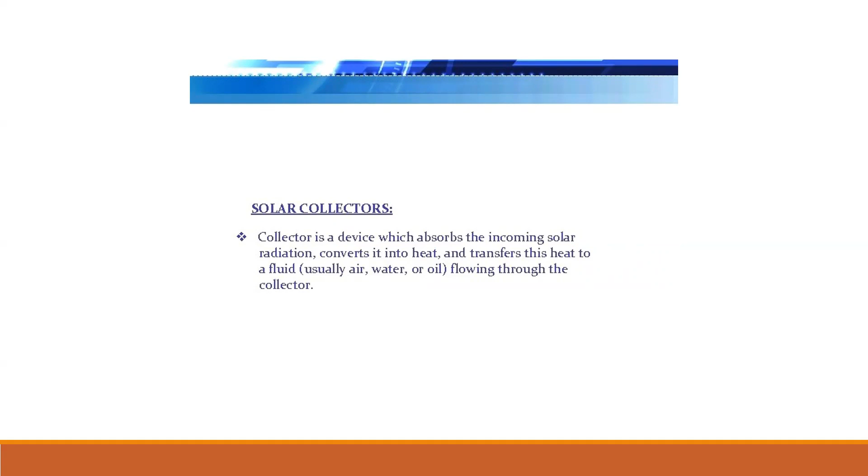Solar collectors. A collector is a device which absorbs incoming solar radiation, converts it into heat, and transfers this heat to a fluid, usually air, water, or oil, flowing through the collector.

Collectors are divided into three categories: collecting, mounting, and fluids. Collecting can be flat or non-concentric, or concentric/focusing. Mounting can be stationary or adjustable. Fluids can be liquid, gas, or air.

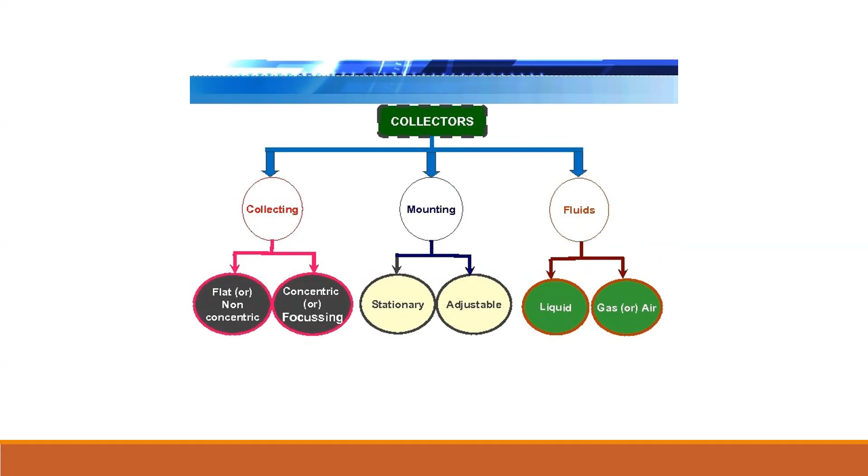Flat or non-concentric type collectors. Flat plate collectors, developed by Hottel and Whillier in the 1950s, are the most common type of solar collectors, widely used for domestic household hot water heating, air heating, etc. Temperature can be up to 90 degrees. In the non-concentrating type, the collector area is the same as the absorber area.

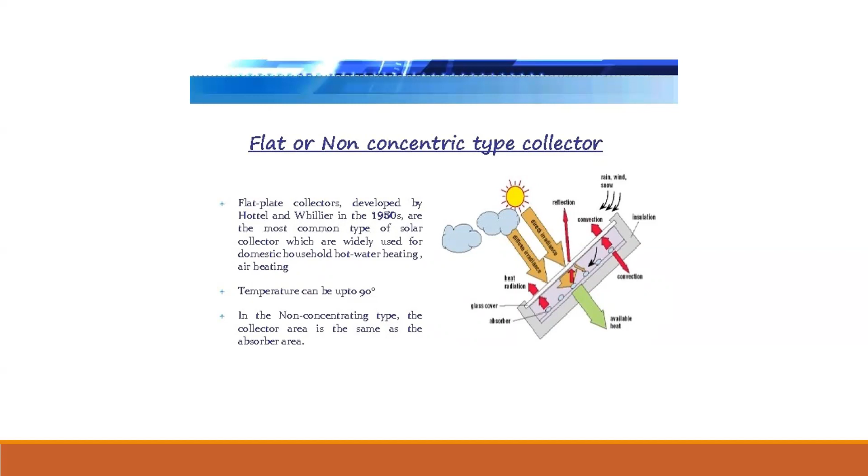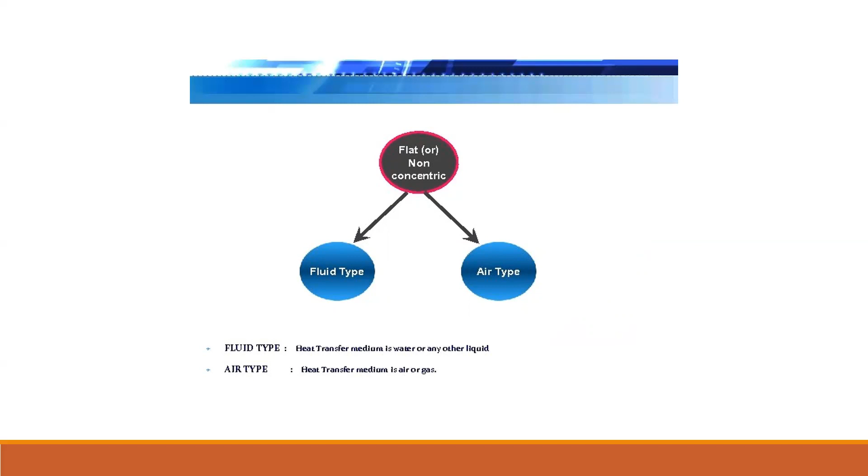The diagram shows the flat plate type of collector. Flat or non-concentric collectors are divided into two types: fluid type and air type. In fluid type, the heat transfer medium is water or another liquid. In air type, the heat transfer medium is air or gas.

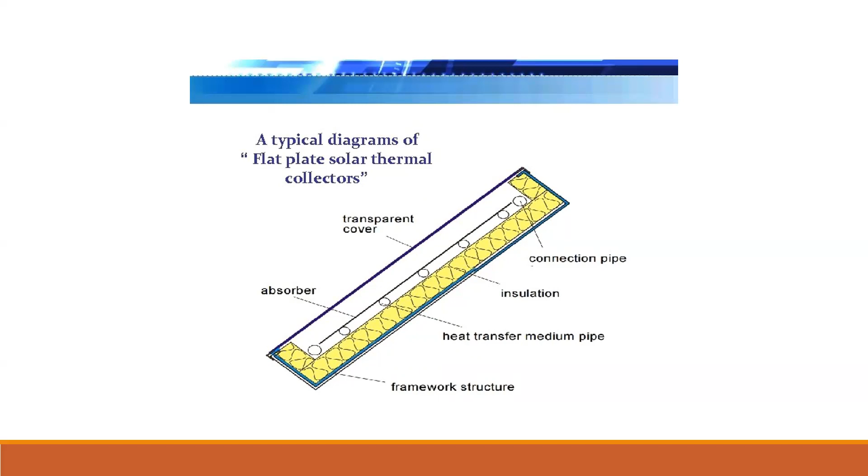A typical diagram of a flat plate solar thermal collector shows, initially, a transparent cover, then beneath it the absorber, then the heat transfer medium pipe, which contains insulation, and the framework structure is shown. Components of a flat plate collector: glazing, absorber, headers, insulation, container.

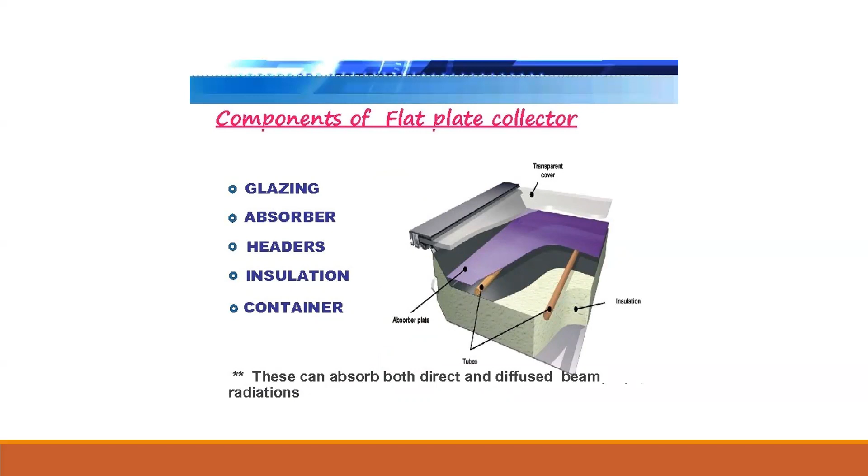This can absorb both direct and diffuse beam radiation. Glazing is made of one or more covers of transparent material like glass or plastic. It is used to reduce convective and radiative heat losses from the absorber, and it is opaque to infrared radiation from the absorber.

The absorber is usually made of copper or steel metal. The surface is covered with a thin coating of primer, then flat black paint. The paint may increase resistance to heat transfer. This coating is applied to maximize absorbance of solar energy and minimize radiation emitted by the plate.

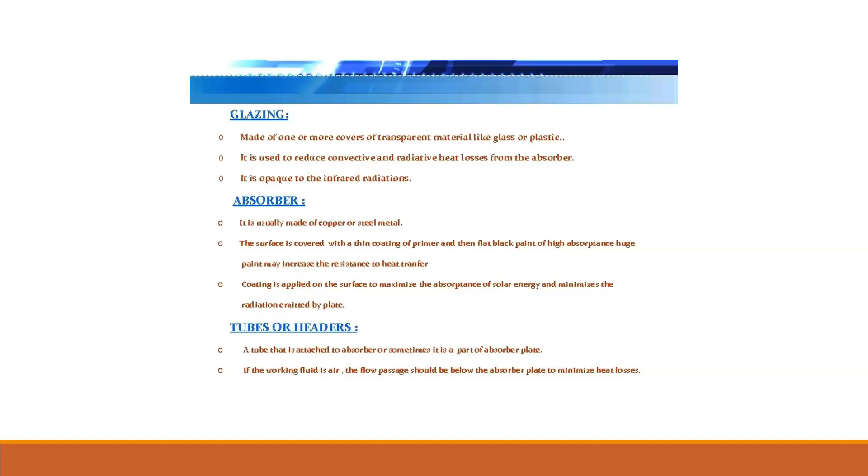Tubes or headers: a tube attached to the absorber, sometimes part of the absorber plate itself. If the working fluid is air, the flow passage should be below the absorber plate to minimize heat losses.

Insulation materials such as fiberglass are placed at the back and sides of the collector to reduce heat losses, for example wool, fiber, etc. The container encloses the other components together and protects them from the weather.

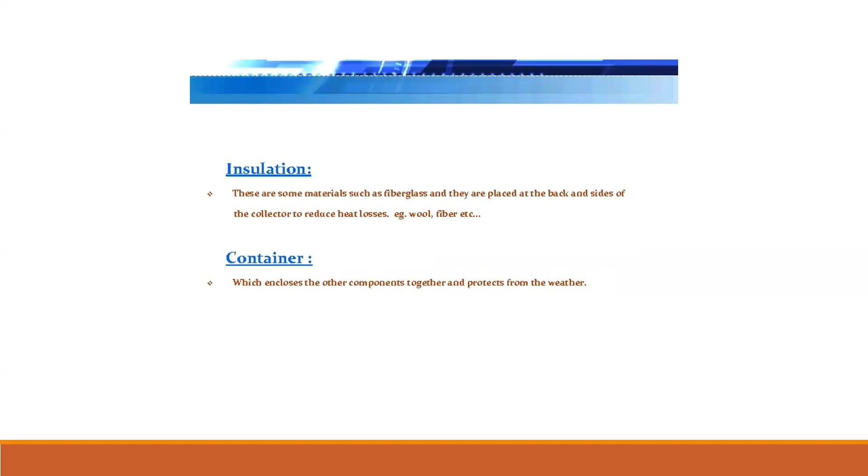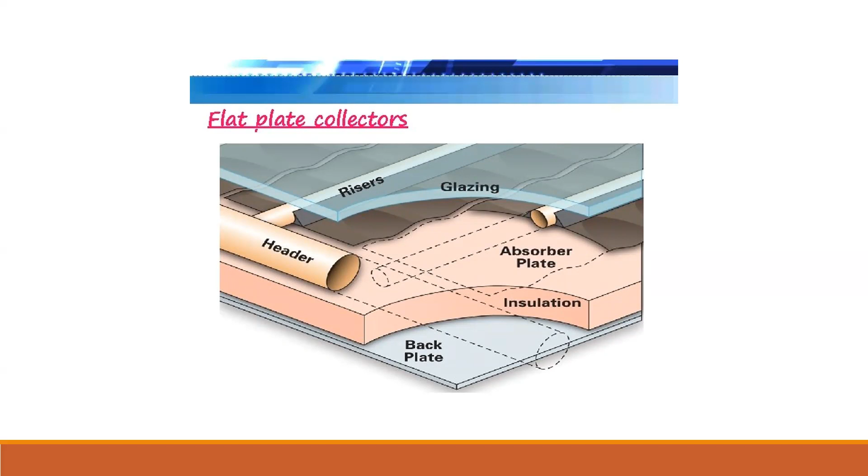The flat plate collector design contains header, risers, glazing, absorber plate, insulation, and back plate, as discussed above. Flat plate collectors, fluid type.

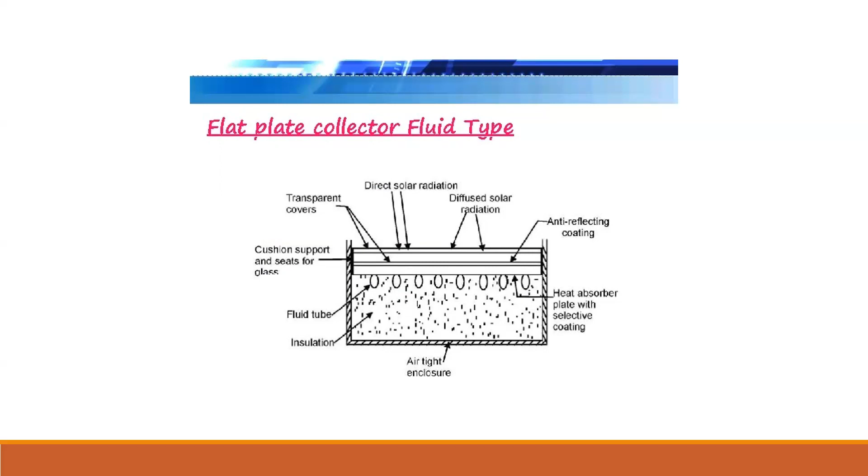Cross-sectional arrangements through the collector plates: tube in strip type. In picture A, we observe glazing, riser, and absorbing plate.

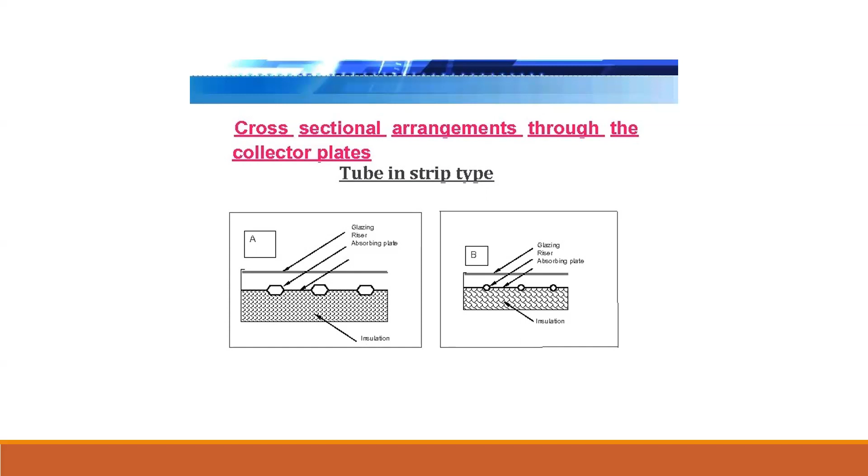The structure present in the insulation is of a hexagonal type, and in B it is of a medium circle type. This shows the cross-sectional arrangement of tube to absorber.

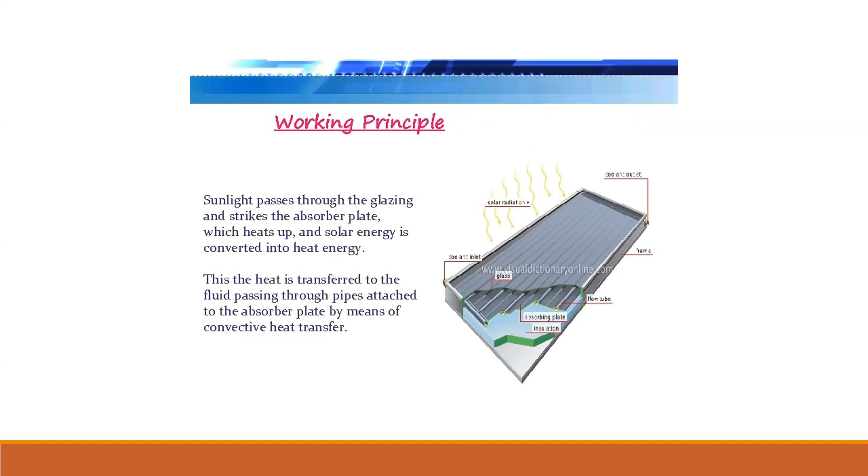Working principle: sunlight passes through the glazing and strikes the absorber plate, which heats up, converting solar energy into heat energy. This heat is transferred to the fluid passing through pipes attached to the absorber plate by means of convective heat transfer. Glazing design: due to two glass sheets being used, losses due to air convection are further reduced. This is mainly used and important in windy areas.

Radiation losses in the infrared spectrum are reduced to 25% from 50% due to the use of two glass sheets. It is non-economical to use more than two plates, as increasing the plates reflects 15% of the solar radiation, decreasing efficiency. The airspace between the cover and absorber prevents heat loss by convection.

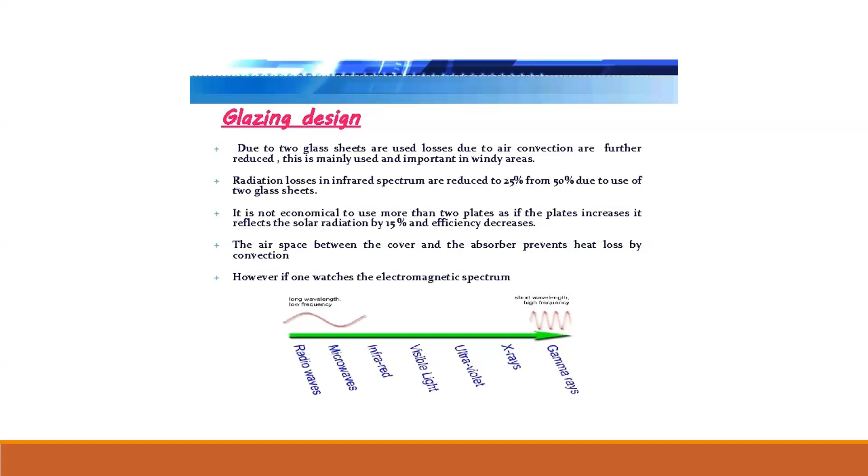If one watches the electromagnetic spectrum, we see that longer wavelength corresponds to lower frequency, and shorter wavelength corresponds to higher frequency. Radio waves have long wavelength and low frequency, whereas gamma rays have high frequency and low wavelength. In between lies the order: radio waves, microwaves, infrared rays, visible light, ultraviolet light, X-rays, and gamma rays.

It works on this principle: when sunlight heat energy falls on the flat plate collector, there is a coil rolled into it, which may be a water pipe or any coil. A transparent top is present for the box.

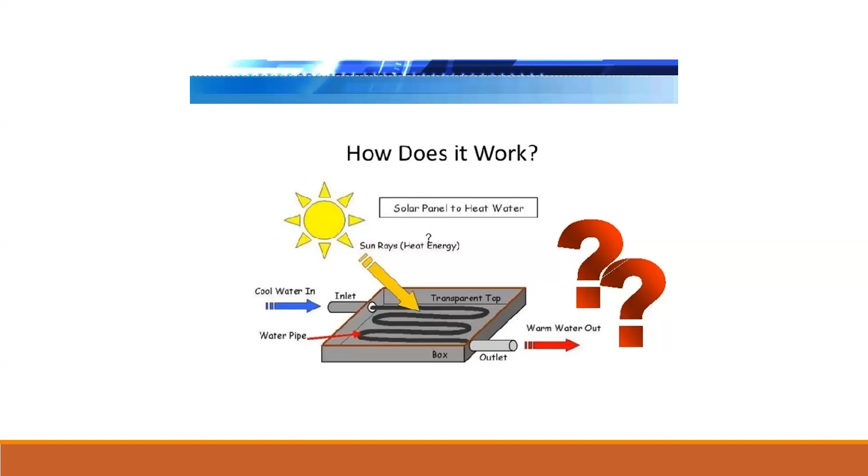Cool water is let into the tube, where the transparent top allows the beam of light to fall on the tube. The water gets heated up and is sent out through the warm outlet. This is the solar panel water heating principle working diagram. Thank you.